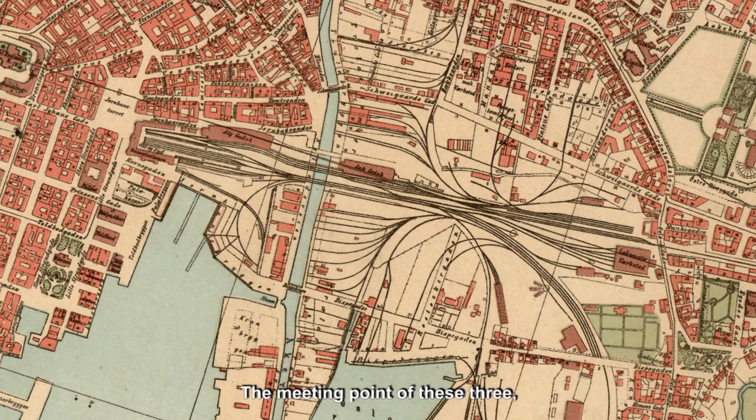The territory of Oslo can be divided into three areas: the city center, which starts from the waterfront and spreads towards the surrounding hills; the residential area, which forms a transition from city to nature; and the surrounding hills, used as a natural border for Oslo's development. Historically, the central area was divided into the inhabited Kvadraturen, the port area along the sea, and the infrastructural and production belt along the Akerselva River. The meeting point of these three spatially different areas is the Oslo Central Station.

During its recent history, densification through public transport has been a very popular way of developing the city. By adding new nodes of public transportation, surrounding areas can be built denser and higher than the adjacent tissue, creating islands of imported urbanity of a scale previously unfamiliar to Oslo. This approach shows a lack of urban design and articulation with the created open and public spaces, especially with their connections to the existing fabric.

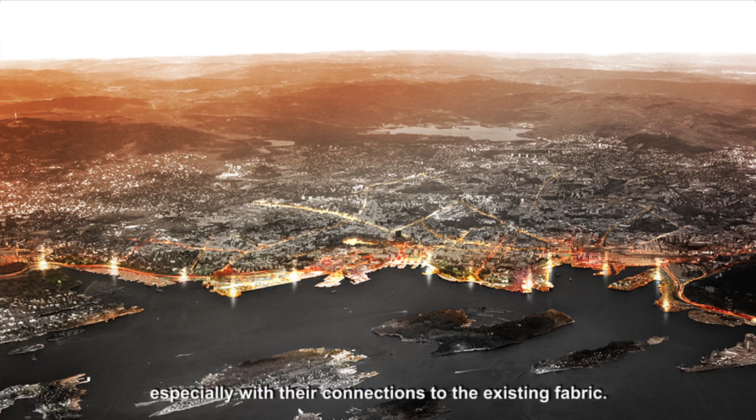The chosen site, Grønland, consisting of the Oslo Central Station, the Oslo Bus Terminal, and the Grønland Metro Station, functions as a hub. However, the multiplication of layers that appears here leads to a confusing intertwinement of paths and directions, where the pedestrian is forced to circumnavigate through a vast field of infrastructural objects.

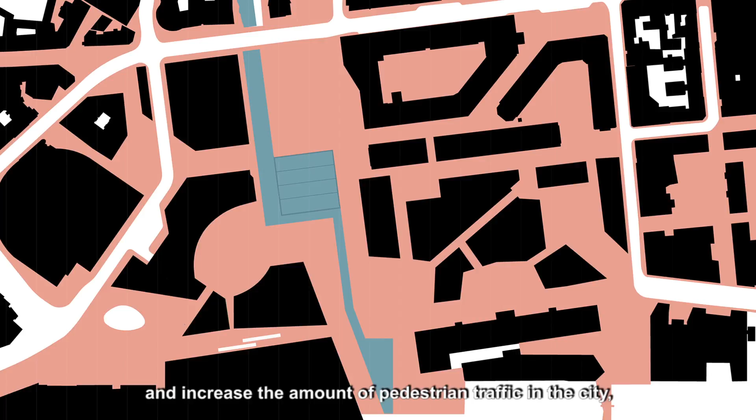The public transportation system, implemented in order to lessen the number of personal vehicles and increase pedestrian traffic in the city, works against the pedestrian. By subordinating the pedestrian to the residual spaces left by vehicular infrastructure, this area more resembles an emergency exit from a city than a representative main entrance.

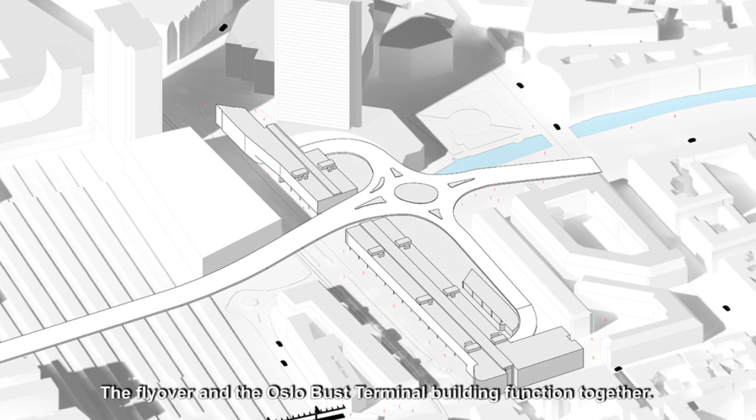The flyover and the Oslo Bus Terminal function together. The bus terminal is envisioned as a gallery passage which connects the area in front of the central station with the Grønland residential neighborhood. The building fails to perform in this way due to the lack of attractive pedestrian content. Its ground floor layout serves primarily the buses and not the passengers. This perpetuates the spatial experience of the backside of the city felt throughout the area.

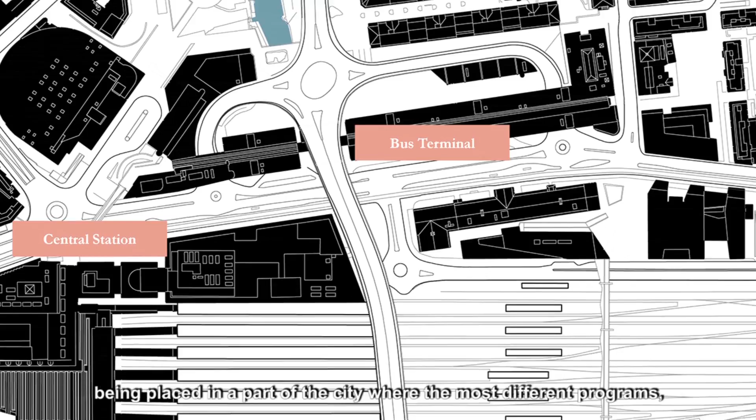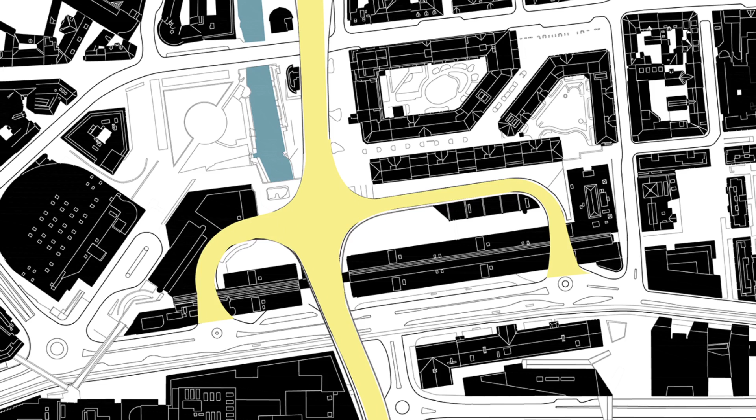The flyover, being placed in a part of the city where the most different programs, users, and typologies come together, instead of helping to connect these entities, separates and segregates them. It disturbs pedestrian traffic. If we consider that decentralization of the public transportation system and the move of the bus terminal to a different location is an ongoing debate, we can consider the removal of the building from the site.

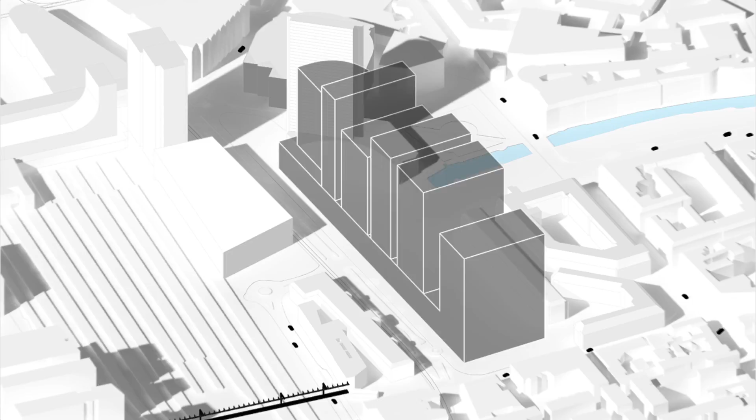Due to the fact that this extremely central site has a high economic and spatial value, it is inevitable that a dense and lucrative development is imminent. We create a plot with the possibility to blend the existing with the new in order to articulate this part of the city, developing by subtracting instead of adding infrastructure.

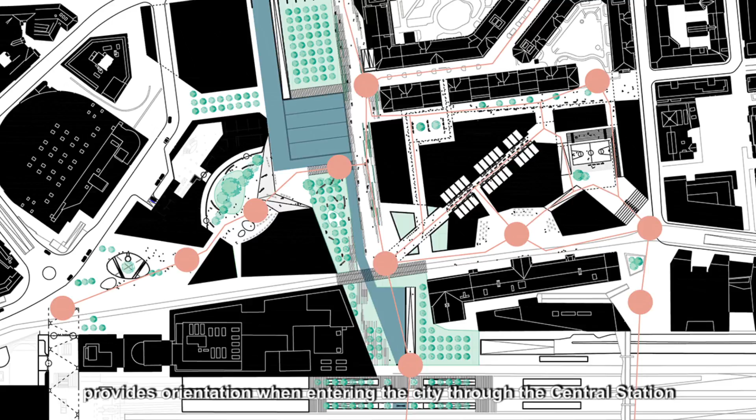Keeping in mind the pedestrian as the primary user of the city, we propose a project which takes into consideration the needs of its surroundings, adds value to a wider neighborhood area, provides orientation when entering the city through the central station, and combines all the parts and inhabitants of Oslo into a place that can be used equally by everyone.

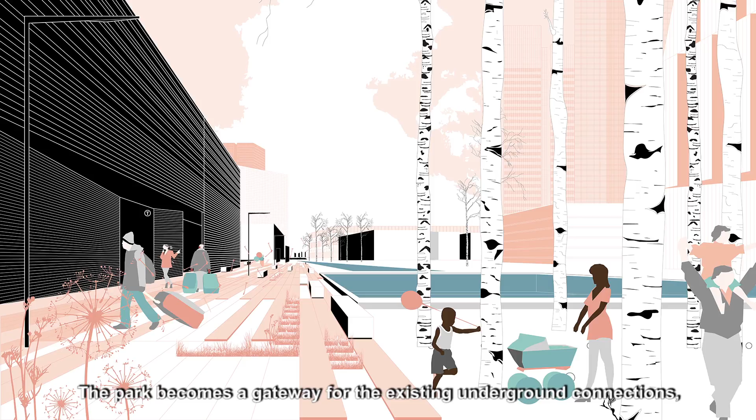The river can now be reopened in all its length towards the sea. Once again, it becomes part of the city. This enhances a series of spatial alignments along the riverside, uniting disparate flows and events by following its path. The park becomes a gateway for the existing underground connections, using the river as its spatial orientation. This creates a unique spatial experience within Oslo.

The surrounding nature is once again connected to the sea, and the river regains its infrastructural purpose within the city. The park and the river render the area more child and family friendly, and they allow the interaction of all layers of society, while simultaneously representing the Norwegian spatial ideals of nature.

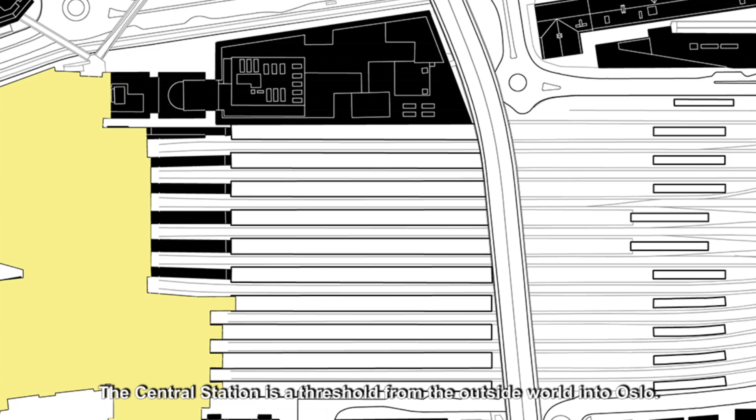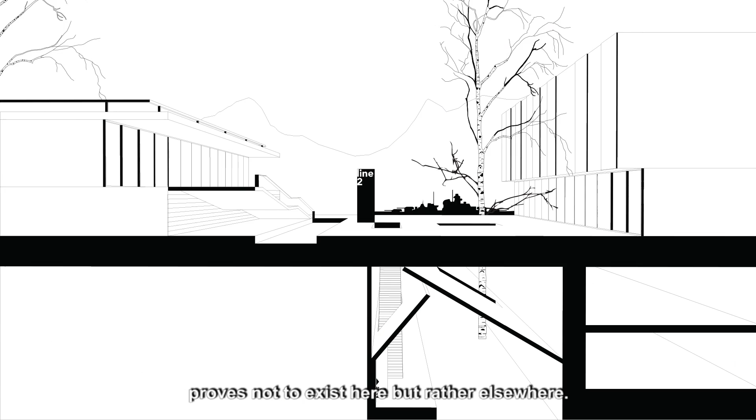The central station is a threshold from the outside world into Oslo. It is the first impression. The typical Norwegian scenery of highly civilized life, living among forest, hills and fjords, proves not to exist here, but rather elsewhere. In reality, the gate to Oslo consists of various types of infrastructure forming a huge knot.

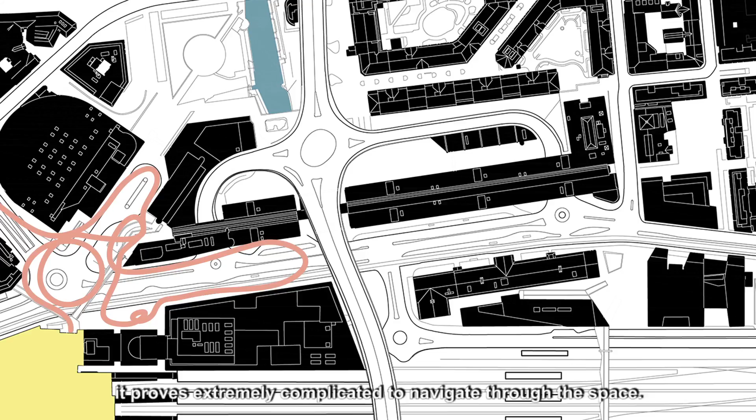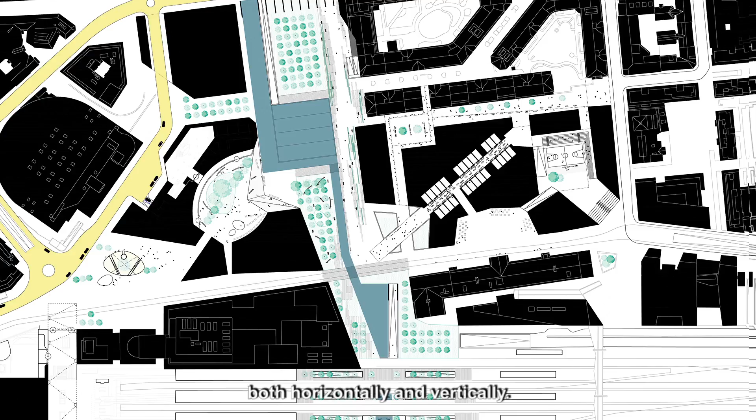By switching one's role from a public transportation user to a pedestrian, it proves extremely complicated to navigate through the space. The proposal introduces a plaza that acts as a common ground for the diverse islands within the area. It is a node that gives each type of transportation a clear path, both horizontally and vertically, situated in a way that pedestrians can orientate themselves.

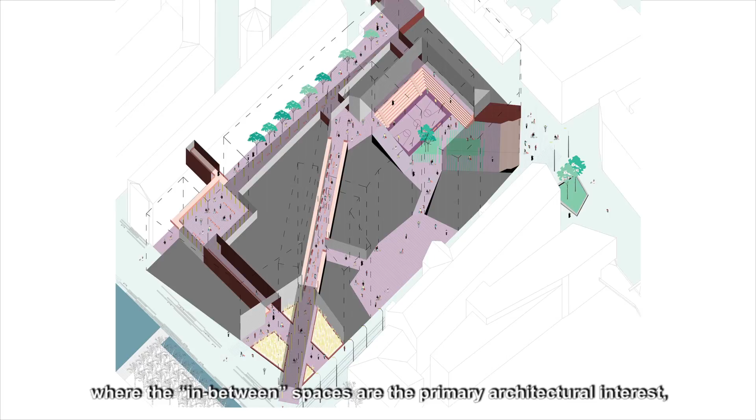As a point of entering the city, it becomes both a physical and metaphorical transition, leading a visitor from a concrete jungle to the real spirit of Oslo. By creating an urban design project where the in-between spaces are the primary architectural interest, a sequence of spatial and visual connections are preserved and created.

The change in scale and density of this part of the project responds to the conditions of the existing neighborhood. A variety of open and public spaces is introduced to the site, where the streets and squares differ in size and use. Each of them creates a specific quality that responds to the existing site and enhances the given spatial features.

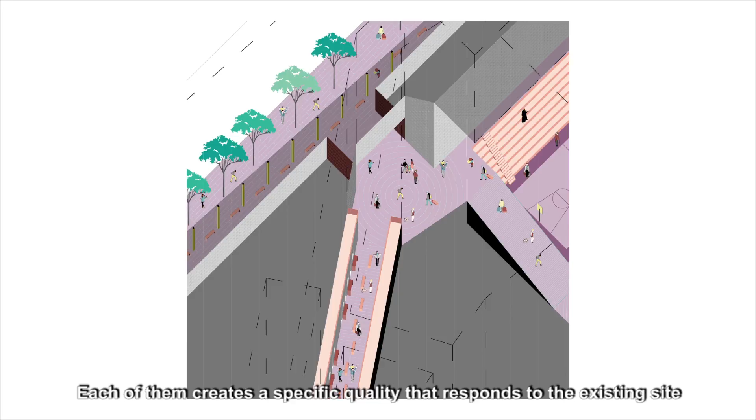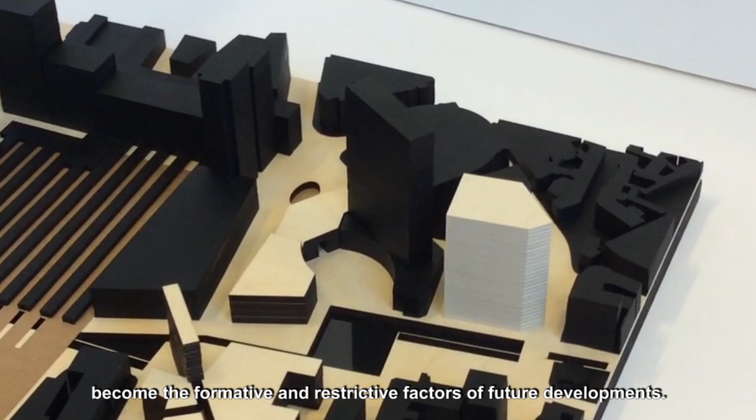Vital public urban areas within this most visited place in Norway become the formative and restrictive factors of future developments. They function and contribute to the existing neighborhood regardless of the program. This results in changing the process of city forming by putting urban design as the leading strategy and not as an accidental residue. We approach developments within the built city fabric by focusing on the performance of the ground.